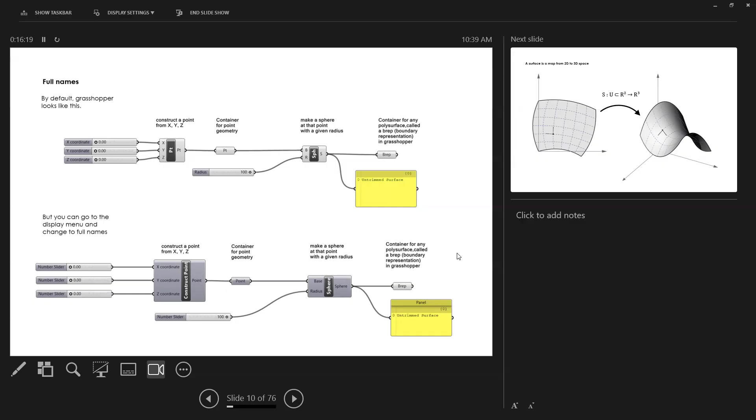So at the top in the display menu. The other thing we talked about, this idea, which I think is the most important idea, that a surface is two-dimensional and that its three-dimensional shape is a map from its two-dimensional self-knowledge to the three-dimensional world. That's what a function is: what a parametric function is, it maps something from the UV coordinates, which are essentially planar, to a 3D form.

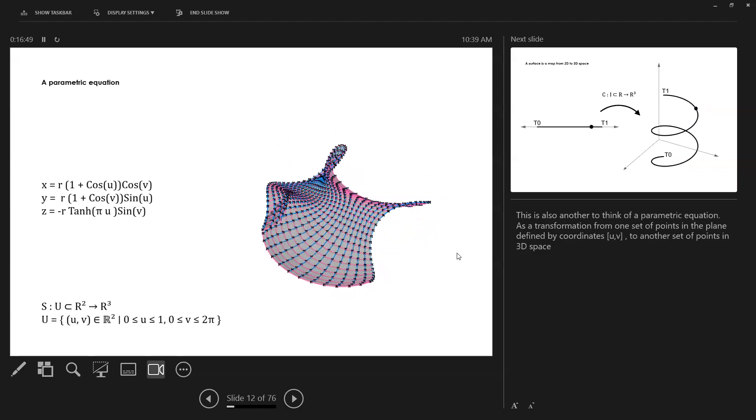And that the same is true for a line. A curve is a map from a 1D space into a 3D space. And so a curve has one parameter, one identification number, which is the t. And that, by the way, I didn't say this last time, is why this command Flow Along Surface does what it does. It just takes things in one UV space and transfers them to the other UV space. The spaces are completely unrelated to each other. It doesn't matter what shape this is.

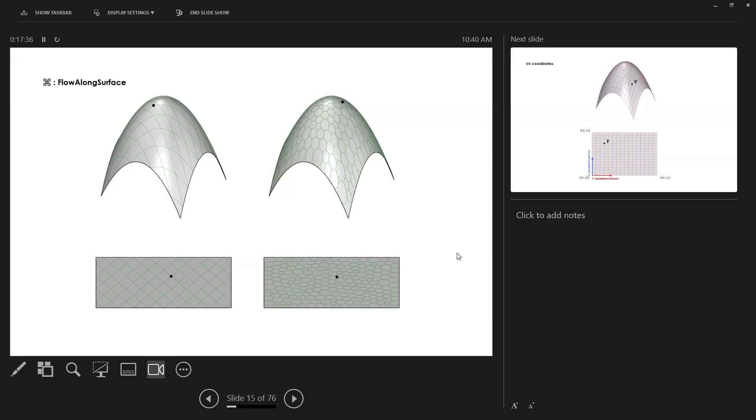This has UV coordinates and this has UV coordinates, and it just duplicates the UV coordinates from one to the other, because every NURBS surface is four-sided, and so it always has U from one number to another number and V from one number to another number, and you could translate that into another surface with an enormous amount of distortion, but without any difficulty, because there's just a one-to-one translation of the coordinates.

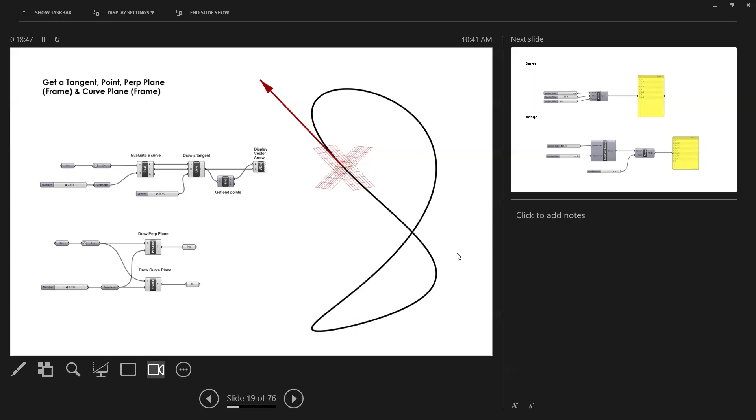We talked about this idea of parametrization, which is that there is the domain of the particular curve, in this case 95.6 to 470.4, the address signature of the t numbers. And if you go to reparametrize, always for both surfaces and curves, that will take that from 0 to 1. And we also talked about using Evaluate Curve with the parameter to get either the perpendicular plane or the curve plane or the tangent at the point.

And then lastly, we talked about this idea of series and range, which are two different ways to get lists of numbers like that. Okay, so I want to talk a little bit more now, moving on.

A little bit about lists and trees. They get very complicated, but essentially Grasshopper stores things in lists. A list is just a long list of either numbers or integers or vectors or surfaces or anything. And when you compare two lists to each other, it just compares the first numbers for a while. And then when you get to the end of one, if it doesn't match up with the other, it just compares the last one to itself. And I'll show this practically in one second.

And then the other idea that's important is this idea of a tree, which is a list of lists. And what happens with the tree is it will compare every item in a branch of the tree to every item in another list. And this is what causes the crash, where things get compared hundreds and hundreds and hundreds of times. And so matching up the data structure of one to the data structure of the other is what causes it to work or not work.

And this is complicated. It's the hardest part of the whole thing, trying to get the data structures to match up with each other so you get the right comparisons between one list of things and another list of things. You just have to get the right things to line up with the other things. And this is the only thing I would say that is really tricky. And for the most part, this is why I try to keep things simple.

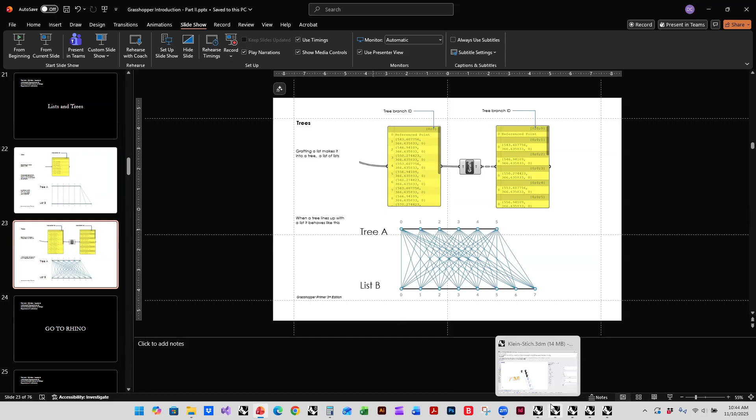I don't like sitting around trying to rearrange my data structure, and then if I change one thing, it'll all fall apart. So for the most part, the things that I show you today, I try to work with very simple data structures. If I can't get it to work in a simple way, I'll come up with a different way of doing it. Okay. So just to give an example of that, if I go into, by the way, I didn't used to do this in quite the same way. I used to go through my models first, so it was much more focused on the physical modeling.

And then I would just give you a lot of scripts. And then I would also go through the Grasshopper more quickly. And I've decided to do it a little bit differently, which is I just want to go through what I think are the important concepts and record them and do them in front of you, because I think there are lots of concepts floating around.

And some of those concepts really don't matter, and other ones I think do matter. And so I want to go through the ones that are important. And I want to go through the physical models one by one, if there's time. I'm not sure there's time, but one by one through the idea of the parametric modeling so that you can see what narrow part of it I apply to the physical model.

That's the idea. When I make some of these physical models, I think it's important to apply a small amount of parametric modeling around a few key concepts. My idea is to show you, in the time that I have, what I thought was useful and how those things were created. Okay, so this is the stuff I went through last class. Some of this is new. It's essentially a different version of the other thing.

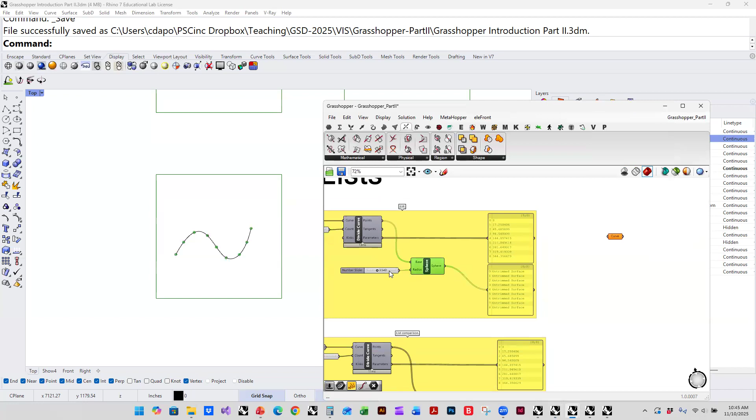So in here, if you have a curve like this, let's hide these. If you have a curve, you go set one curve. And then if you do a divide curve, it will make a list of points. And if you look at the parameters, you can see there's a long list in here, okay?

And if I wanted to make a sphere at each one of these points, I could do a sphere, and I could give it a radius, and that will make a sphere at each one of these points. And if I change the number in here, it'll change the number of points in the list. If I wanted to make spheres of different radiuses, I could make a list of radiuses and compare them to the list of points. So I can do that simply with something called merge.

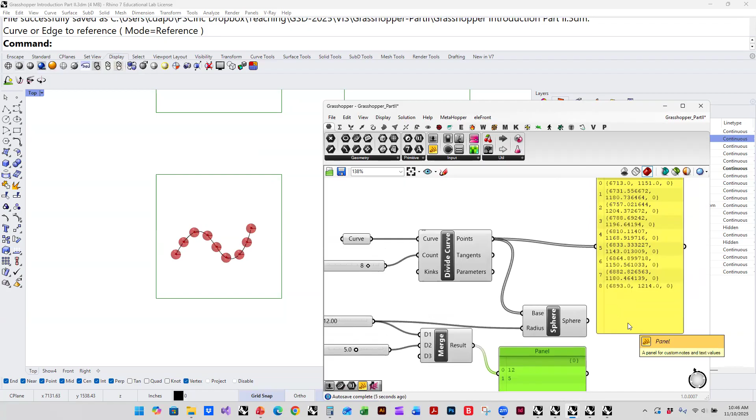Let's put a 5 in here, and let's put a 12 in here. And then if I look at this, you will see there's a list of 12 and 5 and a list of 8 points. So if I put this list of 12 and 5 in here, it's going to compare them to each other. It's going to use the first one first, and then since this list is shorter, it'll just compare to the last one. Okay, so this is the basic comparison of the lists. It's just comparing one list to the other, like that, okay?

But if I were to convert this list into a tree, which is done with this thing called graft tree, if you look at it now, it will be 4 independent lists, each with one item in it. So before it was a list of 4 items, and now it is 4 lists of 1 item. And you could have lists of several items and whatnot. You can also graft things by right-clicking and going to graft. And flatten will smush it all back to a single list. I rarely flatten, but I often graft.

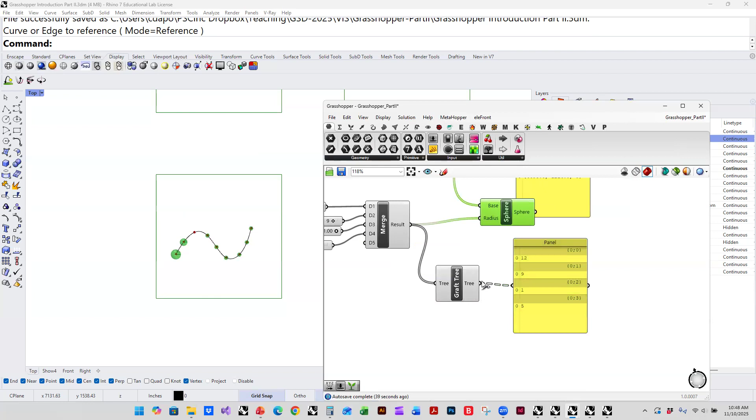So if you put this in here and you zoom in, you'll see that it's doing one of each radius for every single point. So it's comparing the list to the tree in that way. Essentially, what it's doing is trying to match up the structures, with this default behavior. And this is very useful because let's say I had two curves and I wanted to have a different radius on each one. Let me delete this so it doesn't work.

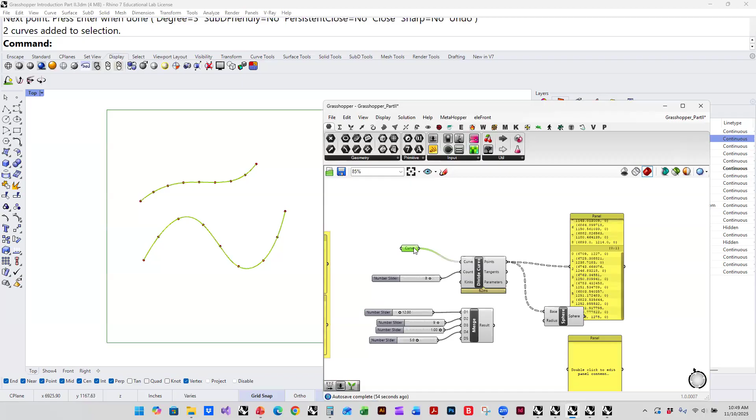If I were to go here and go set multiple curves, now I have two curves, each with multiple points. And if you look in here, there are now two lists. It by default created a tree. There are now two lists, each with 8 points on it.

And so if I were to now make a list of 2 and graft this, if I look at this, you can compare the data structure. So this has 0, 0 signature. This has 0, 0 signature. That one's 0, 1. This one is 0, 1. And if the data structures match up, the behavior is predictable.

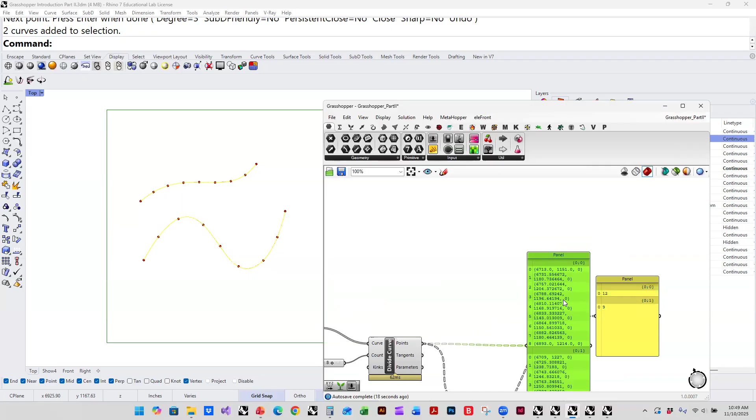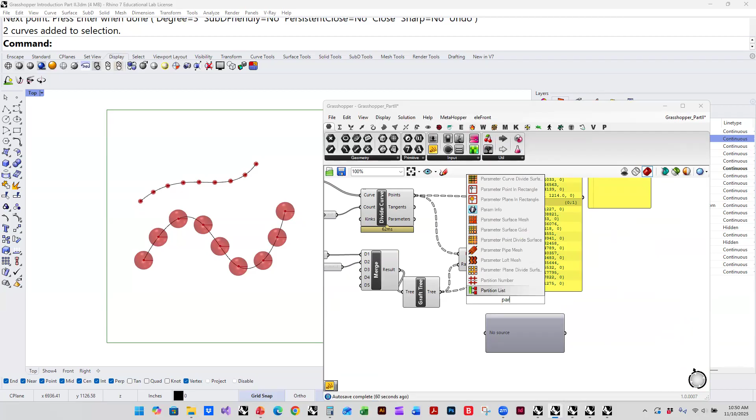And it's not actually that organized, and that's because when they were developing it, they had to make certain priority decisions about when things would be added and when they would not. Okay, so this is the main idea, is that there's lists and trees, and if you look in here at this param viewer, which is right here, this thing that looks like a tree, or you can double click and go param viewer, like there, that thing.

And you put this in here, I can see it says it's data with 2 branches, and they each have 9, or I can go to draw a tree, and it will show me a little graph of a single thing branching into 2. Okay? So when something doesn't work, this is usually why. All right? But I tend to try to keep this as simple as possible. And often when I'm working on things, I'll just do the same setup twice on different surfaces.

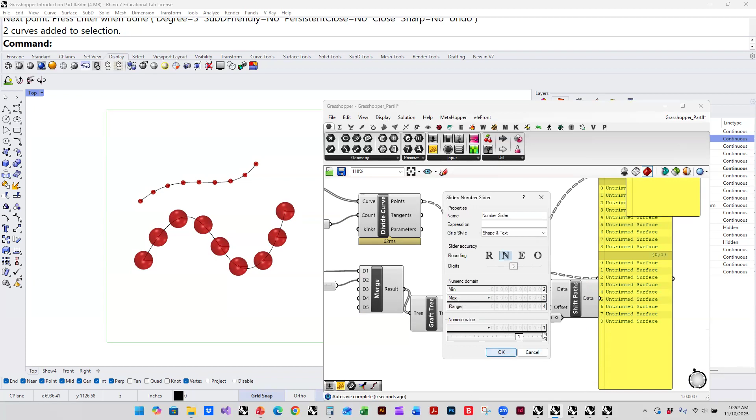Then I wanted to go through a couple more tools for this. So there's graft, like I said. There's also flatten. If you right click and you flatten this, it will smush it all down back into a single list. And there's also shift paths, which takes an integer number and shifts the tree by 1 in either

positive or negative directions. So many times you'll see things in my scripts where there's grafts and there's shift paths. This has nothing to do with anything except trying to get the number signatures of the lists to line up. And remember this component, because it was acting on 2 things, by default it created a tree. So you have to compare the data structure and make sure that they line up. And I usually in my scripts try not to do the little arrow graft. I try to put an actual one in so that you can see it when you're following along. Okay, so that is the first thing.

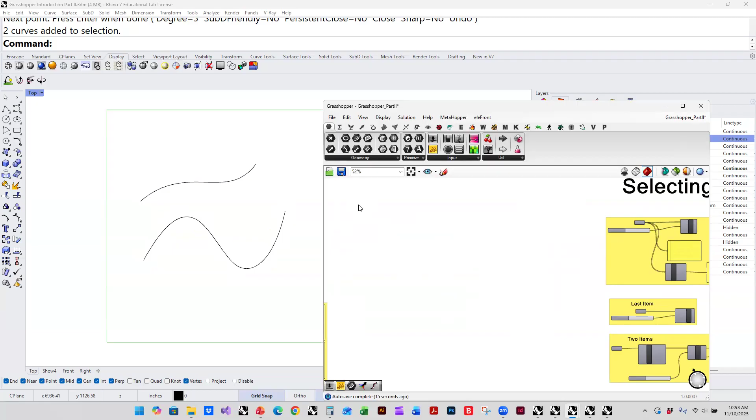And then I wanted to talk a little bit about selecting things from lists, because that comes up a lot. So if I have a bunch of items like this, and I make a container for them. Now remember, these are poly surfaces. So a poly surface is now forevermore called a boundary representation. And so if I do what's called a list item, I think I just have to type item. Yeah, there it is. List item. This takes the index and returns a single one of them.

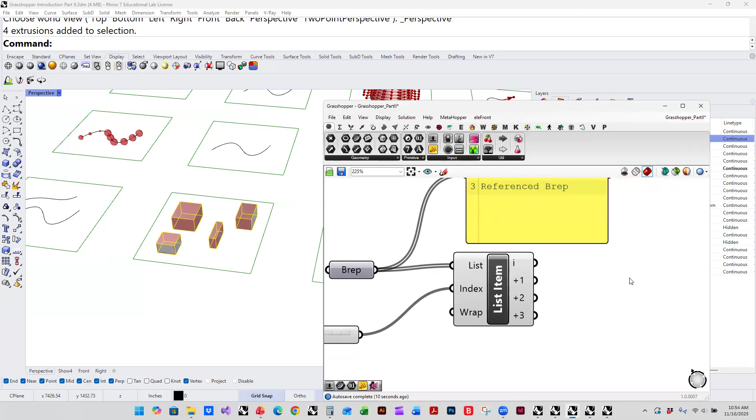So this selects the fifth item. It's actually the sixth item. 0 is the first one. Selects one in the list. And if I wanted to select two things, I can go in here and add. And then I could select the next two with a little merge. So that is how you get items out of a list, by doing this list item thing. I do this a lot. You'll see this list item thing a lot. You can also reverse the list. And then the first one is now the last one in the list.

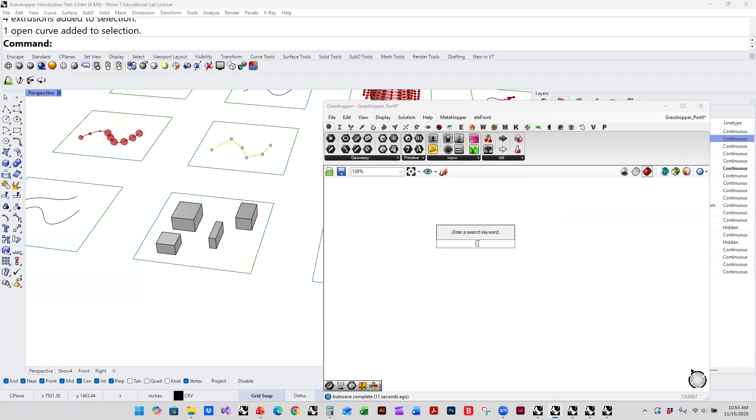And then the other thing I do a lot is I will select every other item in the list. So if I take this curve, and I do the same thing I did before, set one curve, and then I go divide curve, and I put in, I don't know, 25. And then I do this thing called a dispatch. This takes a pattern of true falses. If you mouse over it, you can see it says true false. You can change it by right-clicking and going set multiple Booleans and typing them in here. Or you can do a merge and do these Boolean toggles.

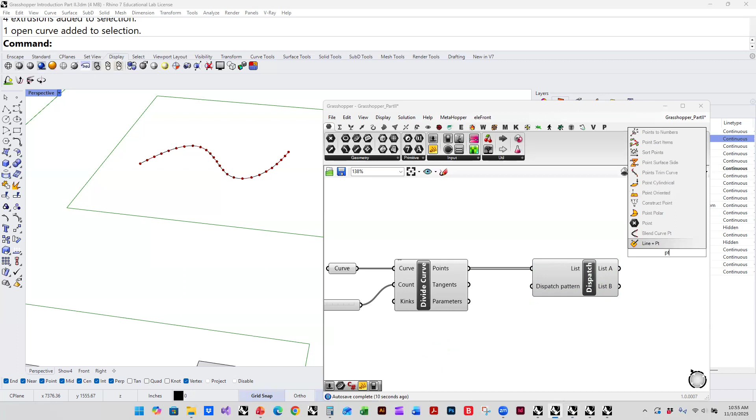It's false, true. And then this one outputs all the falses and all the trues. So this little thing, I usually use it just to split lists. So if I put the points in here, you can see it's getting every other point.

Yeah, there is random. Like you can do random. It's a little more tricky. You can generate a list of pseudo-random numbers. And then I could do a range, this would take a range from like 0 to 10. And then this takes the number of random values that I want. So if I just wanted one, and then I would do a list item.

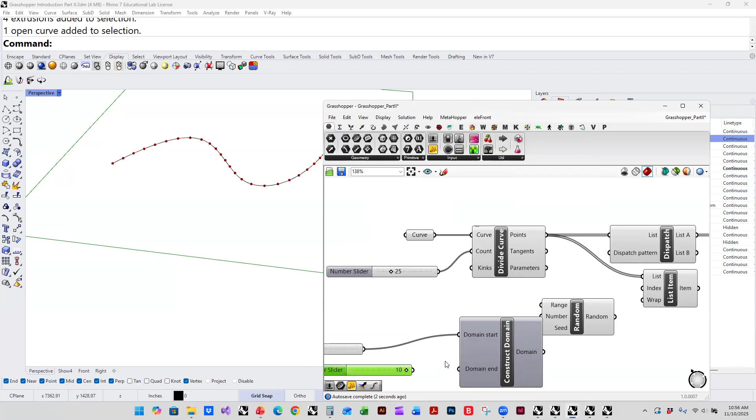So I could do a domain from 0 to 10. And then it's going to give me a random number. And I could use that as the selection. But yeah, you can do that. There's other ways too. I think you can do randomly remove n items from a list.

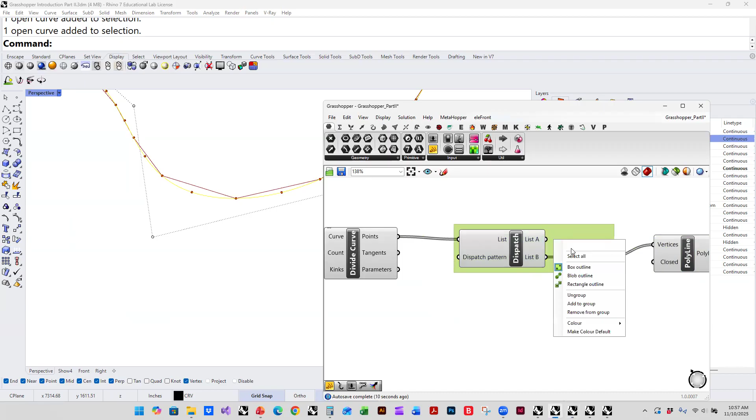But I usually only use this dispatch to make alternate things, and then I'll, I don't know, draw a polyline. That's a polyline now from every other point. And if I wanted to flip it, I'll often just manually go in and remember that there's a part of my script that can cause things to flip. And I'll just group it and say flip here or something. Something like that. Okay. All right.

Is that clear? A little bit. The pacing is hard for me. I never know whether I'm going too slow or too quickly. So some feedback is helpful. Okay. All right.

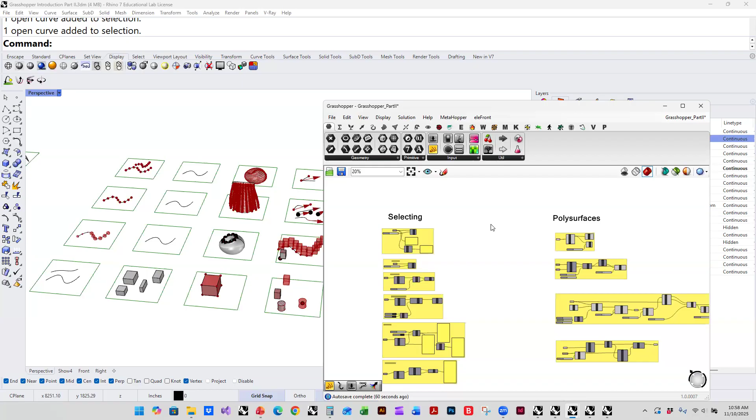So then what I wanted to do now is an application, because by the way, I think I've shown you enough that you can do most things that you need to do in this class already. Since many of your models are poly surfaces, you can't use the evaluate surface component that we used last time. You have to get points on them in a different way. Like if you have a poly surface like this, you can see I could go brep, load it in.

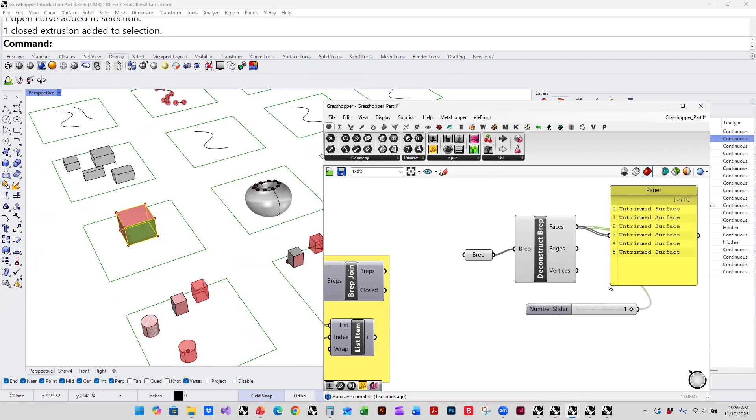Let me turn these off. And then I can go brep deconstruct, and that will take the individual surfaces out of it. And then I can do list item to select one or two of the surfaces. But that is sort of very manual. If I look in here, I would have a list of 3 or 4 surfaces, 5 surfaces, and I could plug that into a script, and I would have to manage the data and make sure that things work out correctly.

But most of the applications we're going to be using are often just about making holes in things, making bolts. Okay. And so what I will often do is just make a bunch of points. Let me turn these off. Okay. So this is kind of an application. Let's hide that. So if I wanted to make some bolts on this thing, what I would often do is just make some points on it manually.

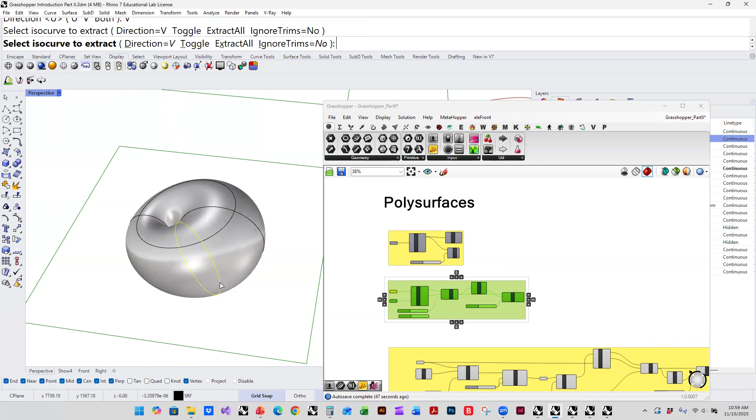So I might get some isocurves. I could even manually divide them, get a bunch of points. And then I can use each of those points to make a kind of a normal bolt to the surface using Grasshopper. So here I'm going to do the same thing I would do before. I can do brep, set one brep, and then I can do points,

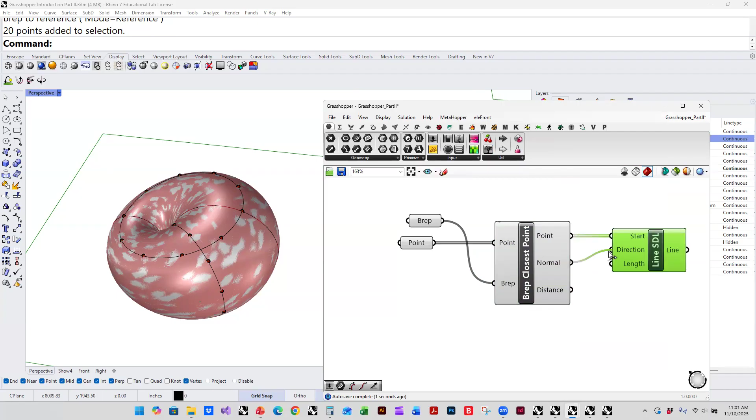point, set multiple points. Now I have a long list of points, and I have a single brep, and I can do brep closest point. Take these points, drag the brep in, and that gives me some information about the surface. It gives me the closest point, and it gives me the normal to the surface. And then I can do the same thing I was doing in last class. I can just do this SDL from the first point in the direction of the normal times a certain distance.

And then I would get these kind of normal things. And then the other thing I will often do, so they go through the surface, is I will scale them from the endpoint. So I do this operation a lot. I'll take the endpoint of this line and just scale it by 2 from the endpoint. So I'll do this other thing, endpoints,

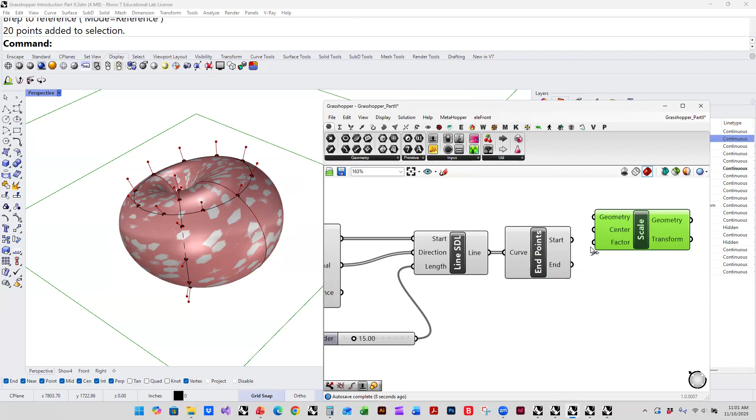take the endpoint, and then the scale is asking for a factor, a center, and a geometry, which, if you think about it, when you type scale, it asks for the same thing. It asks for a base point, a factor, and the geometry. Okay, so it's just kind of like a literal, super literal version of that.

I mean, there are zillions of ways of doing everything, but it often depends on what you want. So I was going to do another application, try to build up in complexity. But often, if you can't get it to work by arraying the bolts around the surface of some pattern, just do it this way. You don't have to do it manually. You can automate 10% of the process.

So I think when you're using these things, trying to automate 100% of it is a mistake. I think you automate the most pain in the ass part first, and then you kind of work up to that. So yeah, first of all, I could have just divided these points from the curves rather than doing the curves manually in Rhino.

Or I could have extracted all these curves from the surface in some way, either by contouring it or by extracting the isocurves. Or I could have just divided the surface down. There's the divide surface component. But in terms of locating them in the right spots, I think that's the question.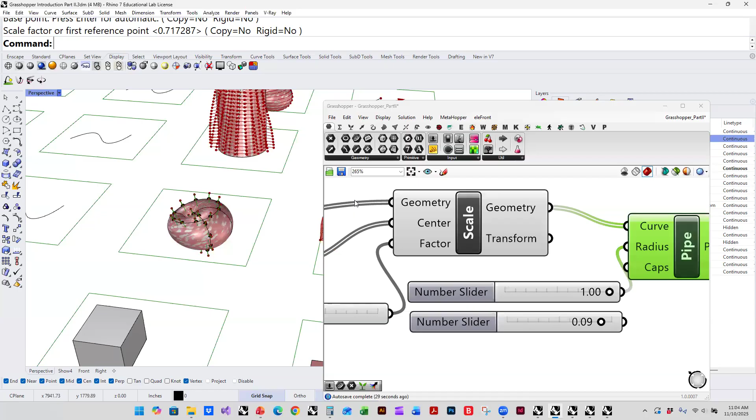But really, what I'm trying to convey is that to do tiny operations requires a very low lift. And if you want to learn the software and learn the process of designing your algorithms, I think doing little things is the place to start. Okay. And then you could ask me and we can figure out how to automate more of it. Okay. So yes.

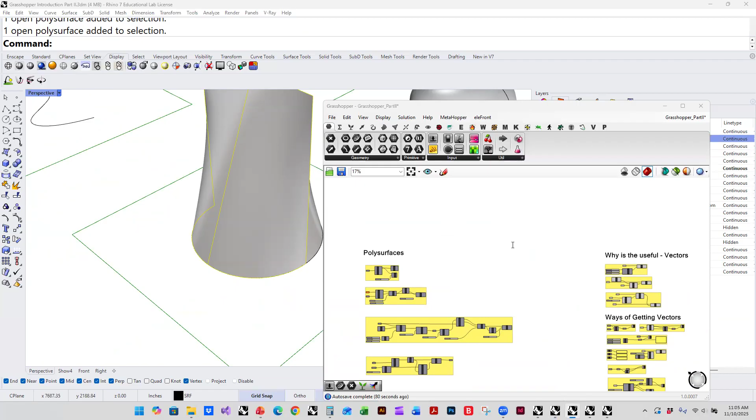So let's say in this example here, let me hide this. I think what I did is, this is a poly surface, so it has multiple things. So it's harder to just extract the isocurves from it directly, because it's many surfaces. So here I'm going to do a B rep, set 1 B rep, and I'm going to do a contour.

And this takes a B rep, it takes a start point, so I need to give it some points. So I will often do that just manually. Just give it a point. It takes a direction, the direction of the offset. So I'm going to do a unit Z, which is the world Z up. Put that into the direction, and then let's do a distance. So let's do something big so I don't crash.

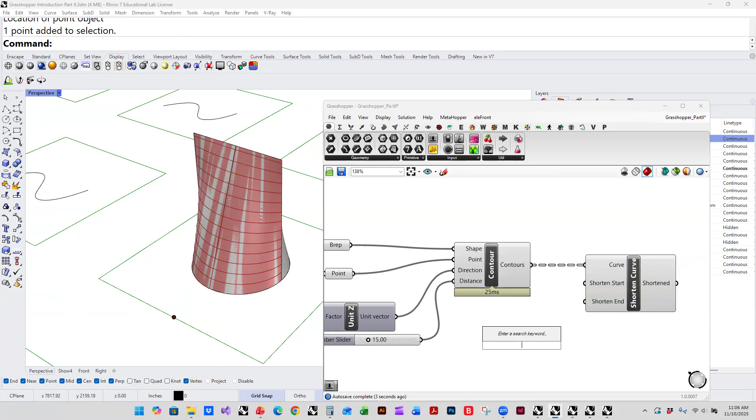One thing that you will notice is that every single component duplicates the data. So the old curves are still in here, and I have to hide them if I don't want to see them. So now I've got a bunch of short curves. And then I could divide all of these down. I could do divide curve. Let's do 15.0. Let's do 8 bolts.

Okay, and now if I look in the data structure here, I should have a list for every single curve that has 8 points on it. So very quickly, I'm getting lots of information in here. That's because if I looked in here, it was already grafted, there used to be 13 curves. And now when I did the divide curve, it did it on 13 and created 13 lists of points. So usually before I plug things in, I will look at what the structure is.

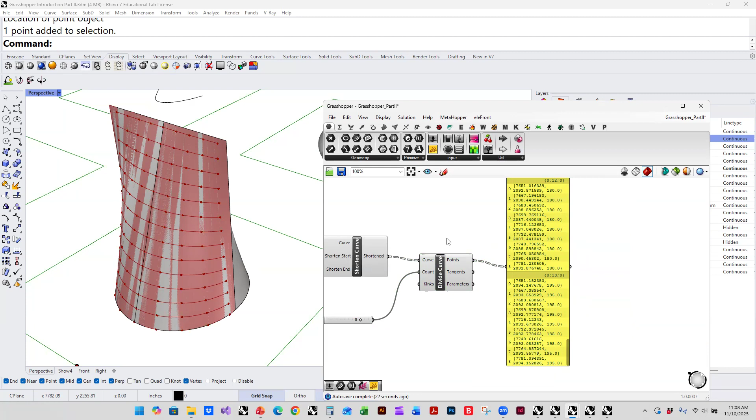Now, these are just the points. And so these parameters don't relate to the surface at all. They're from the curve. So if I want to get the normal to the surface, I have to do the same thing I did previously. I can do a B-rep closest point, go back, find the original B-rep, plug it in here, take all these points, plug them in there, and then I can just do another line SDL from the start point in the normal along the direction.

Okay, so essentially this is the same script I used last time. It's just starting to add functionality. Does that make sense? Anyway, this little thing is for contouring of B-rep and adding normals. So there's a slightly more complicated version of this,

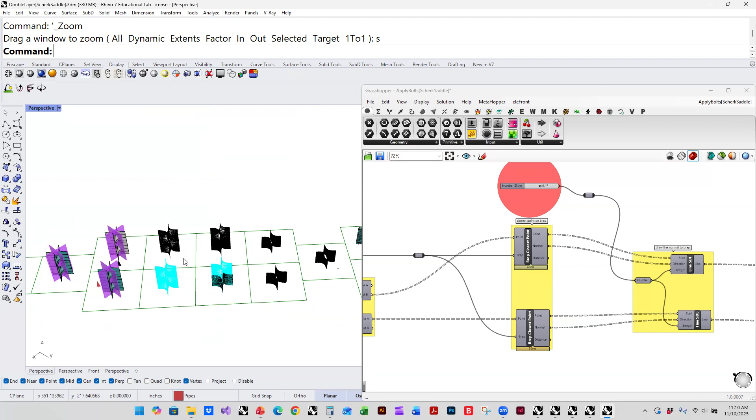which is in, by the way, I'm progressively uploading my model file. So like this is the model file for the tower thing. This is what it looks like, the double layered tower. So this has two double layers of surfaces offset. So you can kind of see the modeling process in here. If you are interested in how I made one of them, I'm uploading them kind of progressively as I get to the level of complexity that I think we're dealing with.

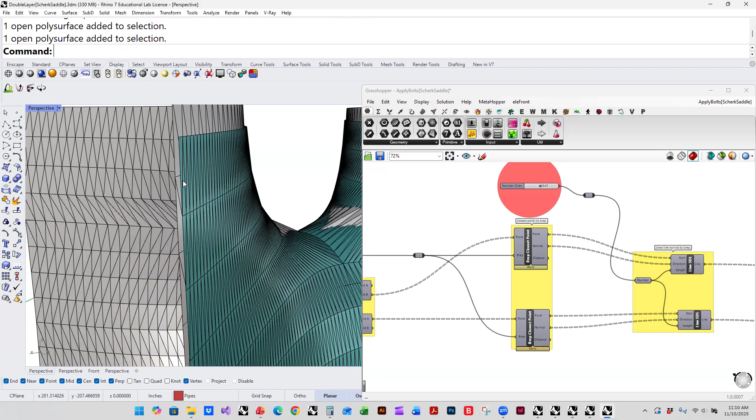So in this one, I have these two kind of back-to-back surfaces, and they're made with all of these grouped strips of things, and they are shifted on each other. So like every other one overlaps every other one by half. And so they need to be bolted here and there through each other. And so the first thing I think I did is I downloaded a model of the rivet that I was using, checked the diameter, scaled it up so that I thought it would work. And then this is the script that applies the bolts to these.

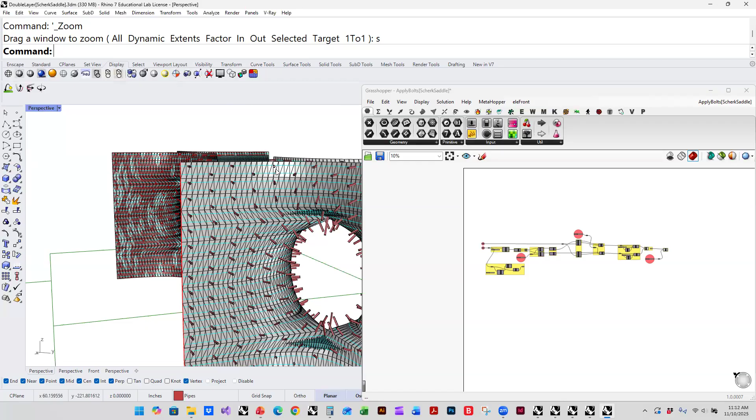Exactly what I've just been doing, but it's slightly more complicated because in this case there are many surfaces, and I wanted to get this alternating pattern of bolts. Okay, so in this case, I think the original version did exactly what I had just done, where I contoured it. But I wanted to make something that was a little more general in functionality. Like, let's say you have a model that's kind of complicated, and contouring it in one direction doesn't make sense. How would you apply bolts to a complicated surface like this in some kind of alternating pattern?

So I think what I did first, this is the manual part, is I just contoured it twice using Rhino. But these curves could have been made some other way. So these are the curves that I want to apply bolts to. I want to apply a bolt here, and then another one a quarter of the surface, another at 3/4 of the surface, and skip the half surface, which is where the back of it is hidden there, right?

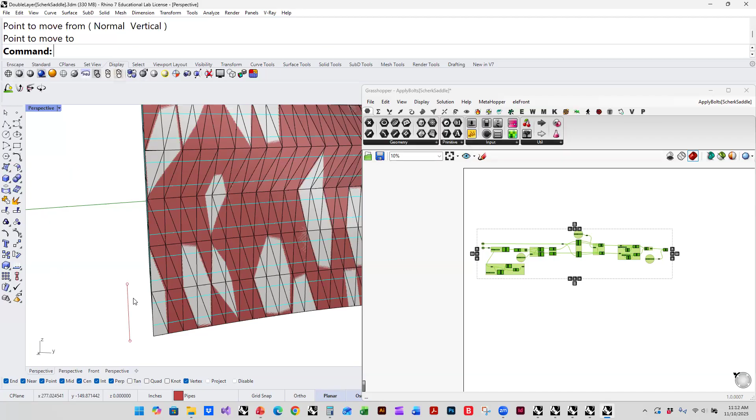So there are two ways to do this. Okay, so let's say I have all these curves. Since I want to take every other curve and apply an alternating pattern, I can either in Grasshopper sort them in some way. Sorting is very complicated.

I could sort them vertically or sort them by the x-axis or sort them by length. Sorting is often a big challenge. Or I can just sort them manually. And in Rhino, when you make something, there's a digital signature for when, and it is a timestamp on every object that was created when it was created.

So in Rhino's memory, every object is contained in a long list, just like in Grasshopper, and they are ordered in the order that they were created. So you can use this Rhino script that I uploaded. It's called like reorder geometry. There's a Python one if you have a Mac, and there's a RVB if you have a PC. And it just lets you click on a bunch of things in the order.

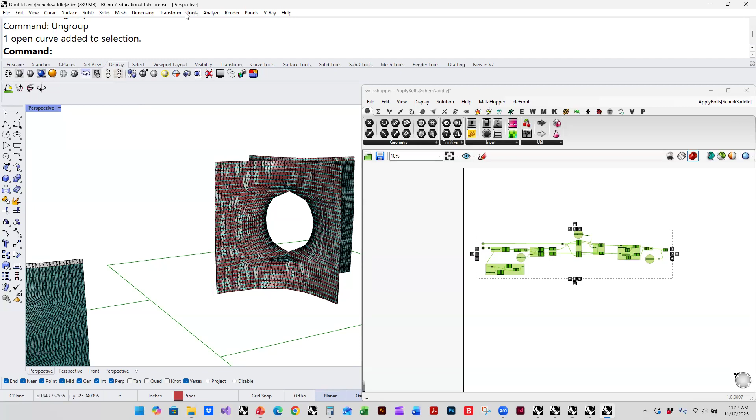You can just go tools, Rhino script, load. You can add it. It's uploaded on the developable strips thing, reorder geometry. Then you can add it. Some crunch. That's because I have too many things open, and because probably it's trying to fetch it from the internet. There we go. Okay, so you can add it, and then you can just go through selecting things in the order that you want them to appear in your

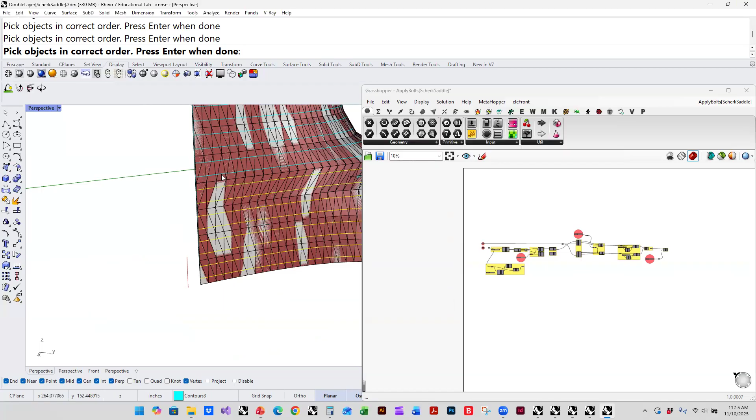in your script. And this is to remove the process of ordering from the Grasshopper, which is extremely annoying. I hate ordering things. It's like gluing. It's one of the most time-consuming things you can possibly do, is try to get things in the right order. There's always one that is like out of order. Awful. So you can just order it manually once.

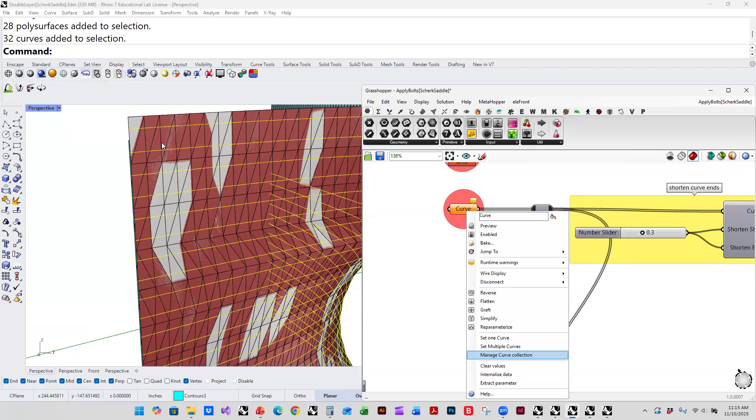Hit OK. It'll wait. They'll be all grouped in an order. And then it'll say reorder. And then you can put those in here. And you can put this in here. And it should, if it's on. Yeah, make a bunch of bolts along those curves in an alternating pattern. This has to be a single poly surface. So I joined all of these into one surface, and there were parts that I couldn't join.

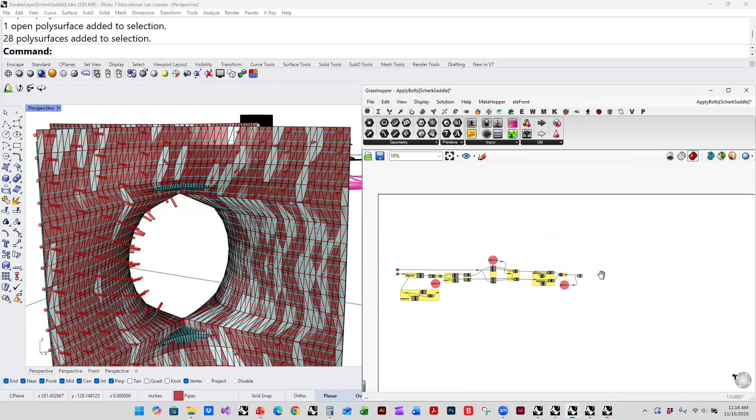For example, there's a part here, this little zone wouldn't join. And if that's the case, I would just quit and just do it twice. I'm trying to say that the goal to automate everything is a fool's errand. Okay, so you can see it's doing it on half of it. It's good enough. All right, so this is the same exact script that I did previously. I'll just kind of rebuild this again, but there's a little more complexity to it.

Okay, so let me turn this all off. I don't know why it's showing this in red. Oh, because it is red. Okay. Let's not make it red. Okay. So now I've got all these curves in here. I've got the B rep in there. Here are my curves. I can do the shorten curve thing.

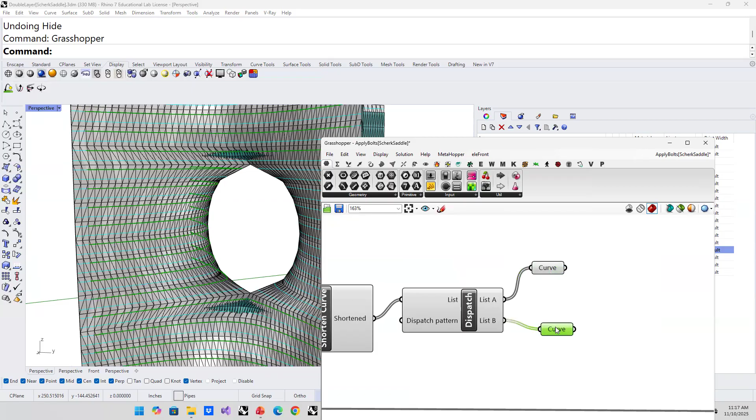And then what I did here is I wanted every other curve separately. So I used a dispatch, and now I've got two lists of curves, one that's there and one that's here. And then I did again a divide curve, and I'll do it by 20 or something. Let's do it by 20. And let's do this one also. And now let's do another dispatch.

And take every other point of this list and every other point of that list. And then we can take the opposite ones of those. And if you look at this, I'm generating an alternating pattern by just doing these dispatches. I took every other curve. They had to be ordered in order to do that. If they were not ordered, it would have been chaos. But I just order them manually, every other one. Then I divide them down, every other one.

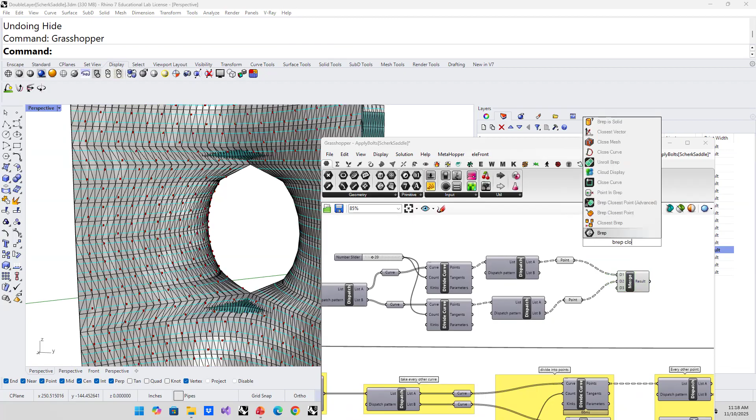And now I can do the same thing again. I can merge these. I can do a BREP closest point. And I can draw the normals. Okay, I'm just doing the same damn thing again and again. It's the same script, just trying to build up layers of functionality. So if you wanted, you could just make manual points and use the first one.

Or if you want to create the pattern, you can create alternating patterns with these dispatch commands, and you can make your own pattern if you want a 2-2-1. Okay, so that makes some sense. Very confusing, I have to say, if you're just watching me do it, but still, I think

it's the same process. The limited number of tools that I've already introduced, I think, are sufficient to do this operation of putting bolts onto surfaces or little holes or whatever. This is all you really need, is this line SDL and this BREP closest point to put holes into models parametrically. Okay?

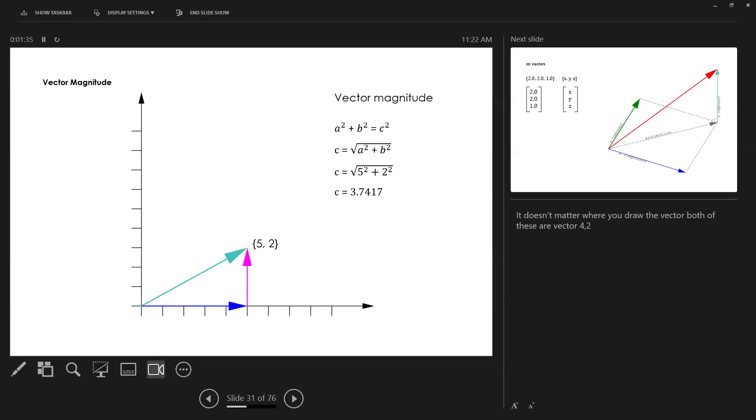And the magnitude is taken using the Pythagorean theorem, that is the magnitude of the vector. That is in 2D. There are also 3D vectors, which are just lists of 3 numbers, X, Y, and Z. By the way, they are the same as points. There is basically no difference between a point and a vector. Sometimes we think about a point as a vector from the origin to the point. They're the same computationally, the same mathematically.

And so you take the magnitude again using the Pythagorean theorem twice. You get the square root of a squared plus b squared plus c squared. And then you can unitize a vector, which means making its magnitude 1. And that is by dividing every component of the vector by the magnitude. So here the magnitude of this vector 2, 2, 1 is 3. And if I want to unitize the vector, it would be this vector, 0.6667, 0.6667, 0.3333. That is magnitude 1 in the same direction.

And so in Rhino, in Grasshopper, very important when you have a vector, like for example, this normal vector. By default, it probably has magnitude 1. But when I put it into a vector, I can right click and go unitize, which will set the magnitude equal to 1. And then if you multiply it by something, you'll know how big it is.

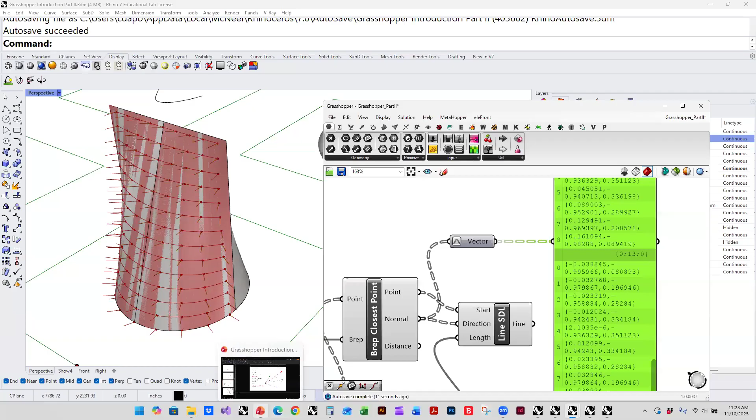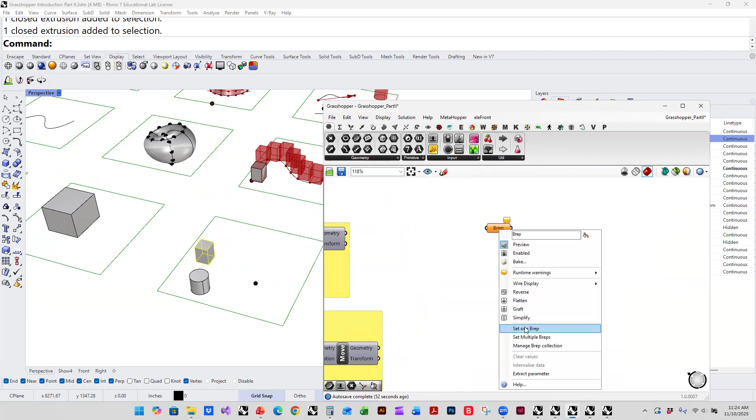In Grasshopper, anytime you want to move anything, anytime you want to do anything, you're always doing things with vectors. So if I go back to my thing here, all of this is vectors. So let's say I wanted to move something. Let's turn some of this off. If I wanted to move this Brep, I need a vector. So I could make a vector X, Y, Z, put some numbers in, 25, 100, 10, and then I can use a move, and the move takes the vector.

And what you will notice is there's no such thing as copying in Grasshopper. You just move something because it always is copying everything. Okay, so that is the vector. And there are many ways to get vectors. So this is just the dumbest way, inputting the coordinates. Well, I can also make a vector between 2 points. So let's do that with this one.

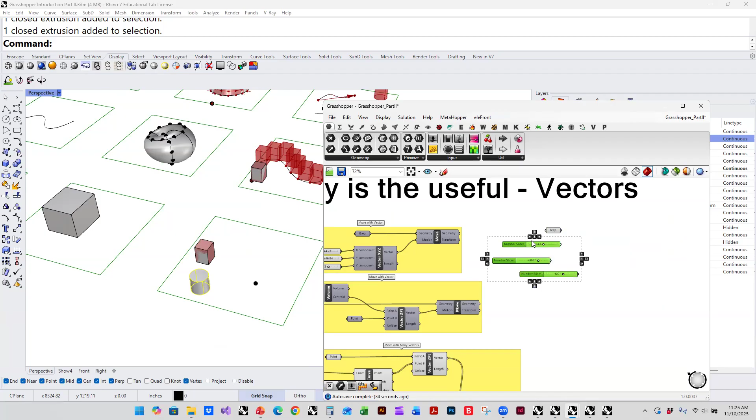I'm going to put a Brep in here, a different Brep. And then I have a point that I created over here. Well, I can get the point using volume. Volume will give me the centroid of the thing if it's closed. Then I can do a point over here. Set 1 point. And I can do a vector 2 point from point A to point B. And then I could do a move.

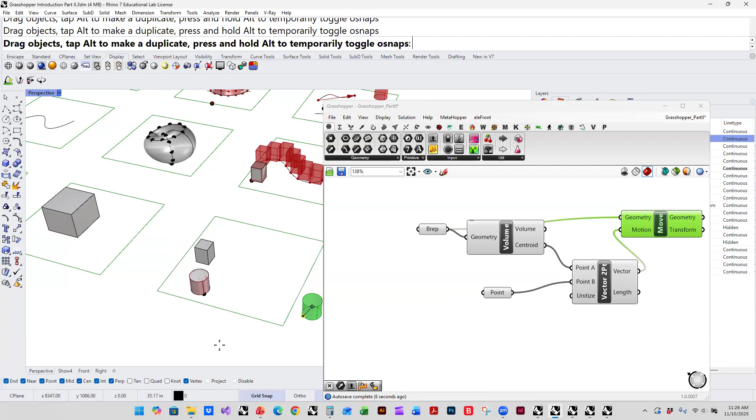And it's going to be moving its centroid to the place. And typically this would be much more kind of normal seeming than you would think, because let's say I have a curve, let's say I have a funny curve, and I'm going to just divide this curve down into a bunch of points. And then rather than having a manual point here, just move it from its centroid to all the points along the curve and use that.

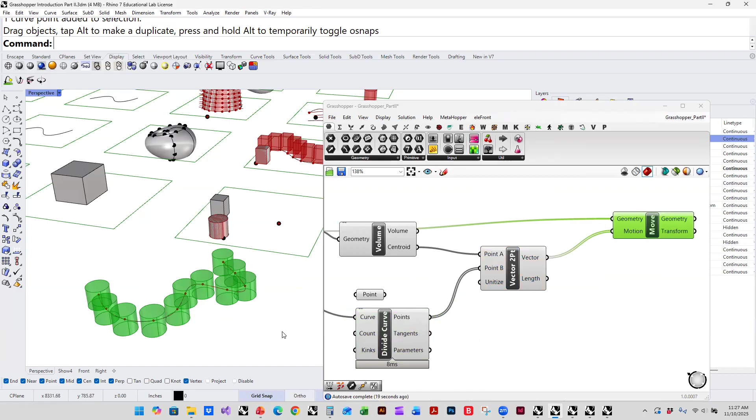So typically, if I wanted to say copy some geometry around on a surface, that would be how I would do it. I would have a start point near the geometry, sometimes created manually. Sometimes, rather than doing this centroid thing, I would just do a point. And then I have a bunch of points that are created in some other process. I make vectors between them. I use those vectors to move.

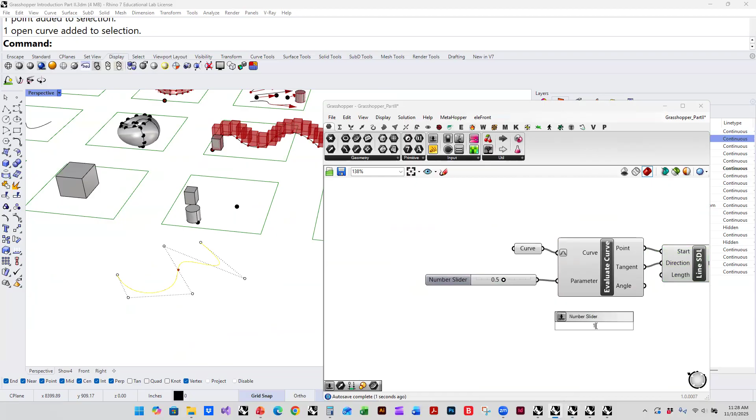You can get vectors in lots of ways. Like I said, you can get them with 2 points. You can get them by entering it manually, or often you can get it, again from last class, by evaluating the tangents of things. Okay, that's also a vector. So these tangents are vectors, and the normals that you get out of things are vectors. Does that make sense? Okay.

So then there's vector arithmetic: vector addition, adding two vectors, tip to tail. This is useful because if you add two unitized vectors, you get the bisector between the vectors. So if you want to move something between two directions, first you unitize the vectors, add them, then you unitize the output, and then you can move something along that direction. There's multiplication, vector multiplication, just multiplication by a thing.

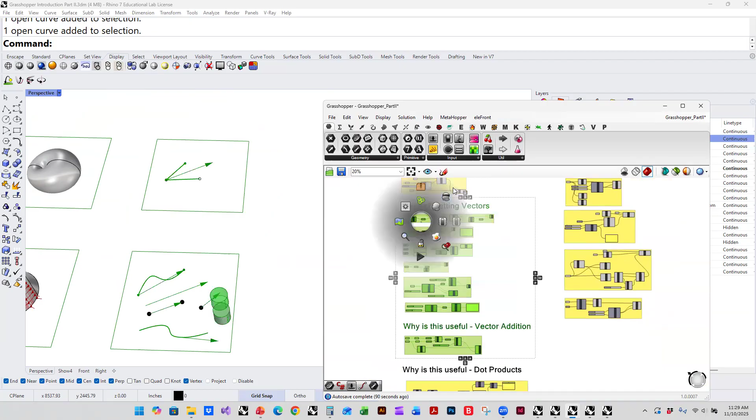So like I was saying, let's say I have this right here. Let's say I have two curves. Set one curve, set another curve. Let's turn all this off. These are two curves. If I just convert these into lines, since they are lines, and then I convert them into vectors, Grasshopper will just do it for me. This is another way to get a vector. First, I have to convert them into lines, then I convert them into vectors.

And then if I unitize both of these, and then I add them, and then I multiply by a number like 150, and then I do an SDL from the start point of one of these curves along this direction. Okay, that's the bisector. Yes.

What's the difference between a line and a curve? A line is defined in the computer very differently. A line is only defined by its endpoints and it's straight. So the computer doesn't store anything except the endpoints. Very minimal mathematical structure, super fast. If you do a curve, it's the whole NURBS structure. And so it doesn't quite know how to convert it into a vector, and it won't give you the magnitude of the vector. Sometimes it'll try, but it's a little unpredictable what it'll get.

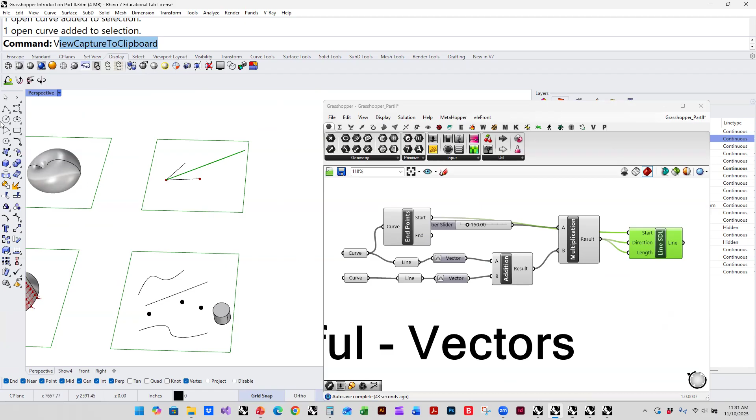So if you turned that curve right there, that swooshy one, into a line, it might say it can't do it, or it might try. Let's try. Set one curve. Line. Yeah, it can't do it. But if I wanted to, I could take its endpoints and I could do a line from the endpoints. Okay. All right. Yeah, it's interesting.

It's a different data structure. So it goes back to this idea of what I was talking about at the beginning of the classes. The curve class knows different things than the line class. The line class only knows its endpoints. It's all it knows. And it has different functionality, like it can calculate direction, it can know its length. And then the curve class knows its length in a different way.

So this is what I'm showing here. Basically, for me as a person, I can't understand something unless somebody shows me how to implement it. I feel confused unless I am seeing the implementation of what I'm talking about. So there's also this vector display, by the way, which will just display it. So this is just vector multiplication and vector addition in practice. That's all I'm trying to show here.

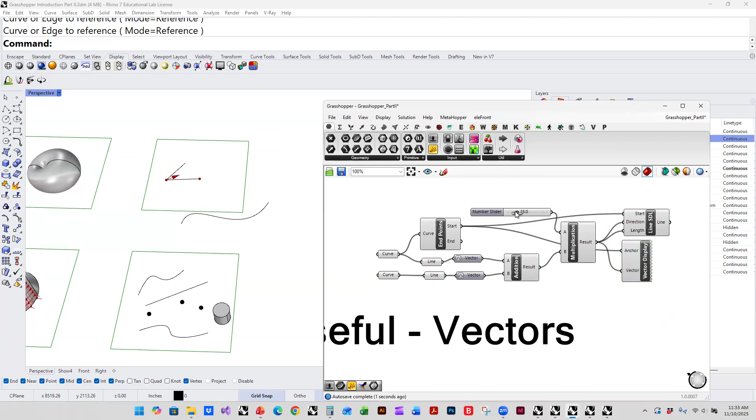And then if these lines were flipped, it would do something weird. It only works because they're pointing in the same direction. So this issue of which direction it's pointing is actually another kind of troubleshooting error that comes up. Okay. Does that make sense? All right.

Now the dot product. These are the two things that I feel like I actually want to talk about. The dot product, okay? The dot product is trig. Remember trig. These are the trig functions. You spent a whole semester on this in high school. That's it. A squared plus b squared is c squared, the Pythagorean theorem, sine, cosine, tangent, the ratio of the sides.

And this is because the sine and cosine and tangent are defined by the Pythagorean. That's why they exist. Okay. So they are the Pythagorean theorem applied to the unit circle, and then the ratios that come out of that, and then they're just put in a big table that your calculator knows and spits it back out.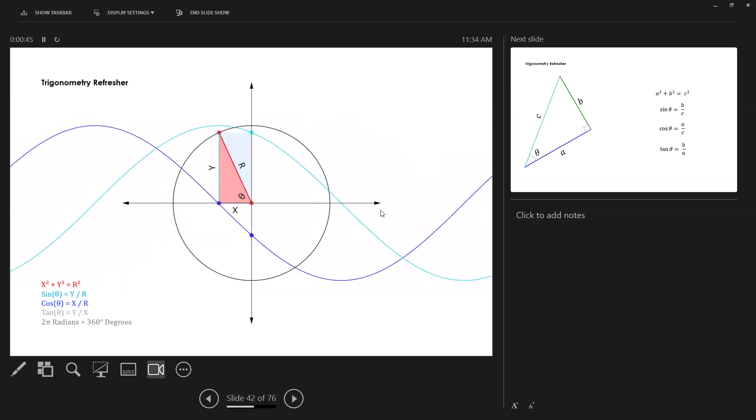Okay, so the dot product is also called the projection product. And it is defined by the projection of one vector onto another. And that would be the magnitude of the vector, which we write as its absolute value. That's what we mean by the absolute value. We mean the magnitude of the vector times the cosine of the angle would give you this sum called the projection product.

So the projection of A onto B is the magnitude of the vector times the cosine of the angle between them. And that number only depends on the size of this vector. So for the dot product, we multiply it again by the magnitude of B. So the dot product is the absolute value of A times the absolute value of B times the cosine of theta. Or you can calculate it in this other way. It's very important. It's one of the most important things in the world, the dot product, because it tells you some information about the relationship between two vectors.

So if two vectors are pointing in one direction, the cosine of theta is 1, so the dot product is a maximum. If two vectors are pointing along each other, the dot product is positive. If they're 90 degrees, the dot product is 0. If they are opposite directions, the dot product is negative. And if they are completely 180, the dot product is at a minimum. This is how you can tell whether things are pointing in similar directions.

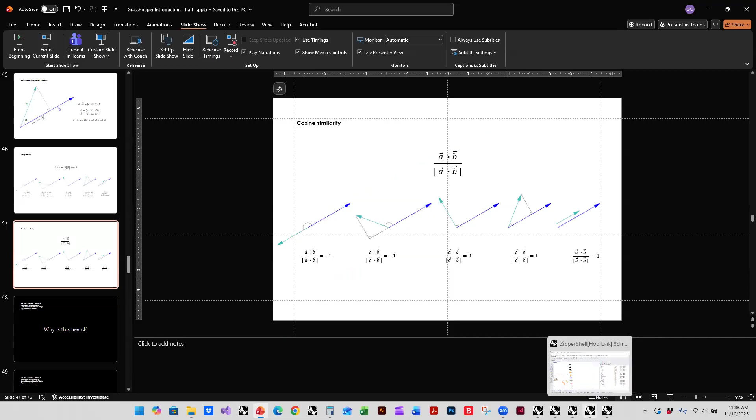So, to give you a very practical example, if I have, let's say, a sphere, and I do set one B-rep on this sphere, and then I divide surface, and I take a bunch of points, and I draw all these normals. Okay, here's a bunch of normals. Let's make them longer.

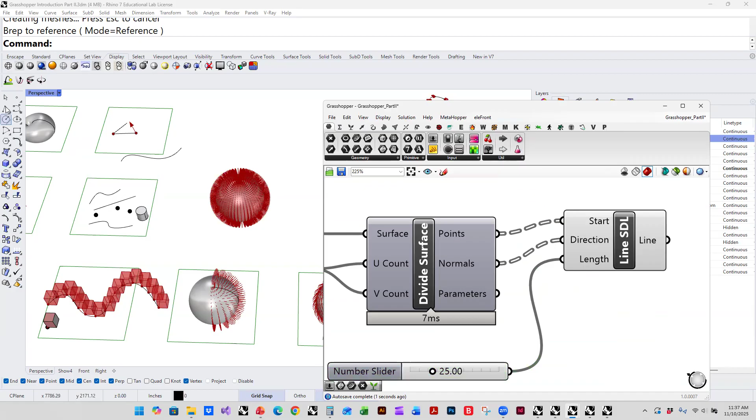If I just have a single line, let's take a line, let's put it in here, and let's convert these to vectors. So let's take the vector here to unitize this. Let's just take these vectors, unitize them, and let's do the dot product between these vectors and this one vector. So I'm taking the dot product between all these normals and this one vector.

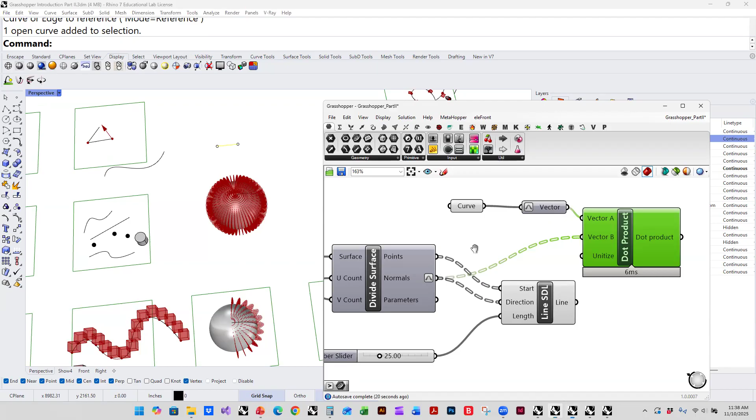And now as I drag this, it's telling me which of these vectors are pointing in the direction of the other vector and by how much. Okay, this is so cool. The dot product is so useful.

I take the dot product of a vector and all the other vectors, and then I compare it to a number, and it tells me whether the things are positive, negative, or 0. That tells me whether they're pointing in the same direction. This will come up over and over again if you ever do a computational design class here. Dot product.

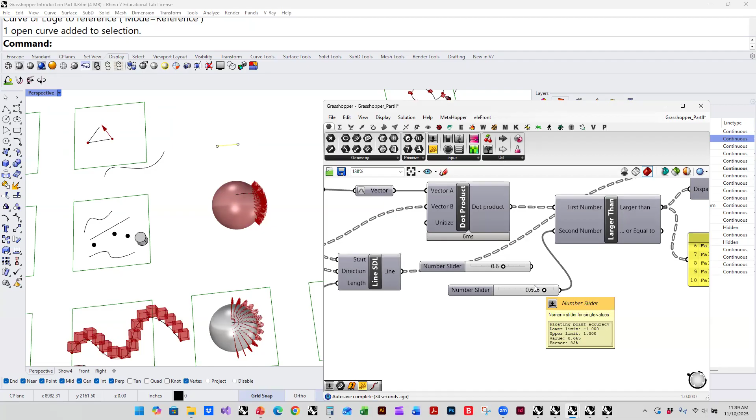Okay, the other one that's important is down here, dot products, and this right here is a little visualization of the dot product. Then the last one, the cross product. The other one that's very useful, the cross product. Remember the right-hand rule?

Find another vector that's always perpendicular to them. Oh my God, so great. The cross product defines a plane also, because two vectors define a plane. And it turns out the cross product's magnitude is the area of the parallelogram, where you can do that funny formula, which is also called the determinant, but it's not important. You never need to do it. It's just useful only for finding the perpendicular vector to two other vectors. Do this 20 times a day. Okay.

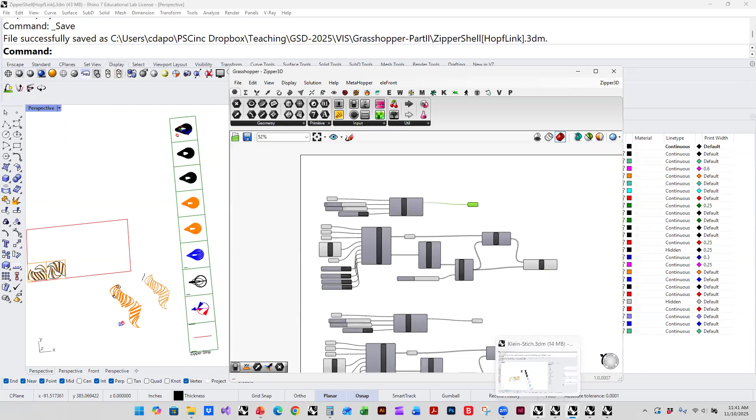So these are them again. Okay, but examples. Examples. Back to my sphere here. Instead of doing the dot product, let's draw all these normals. Okay, let's make less of them because this is kind of confusing. Instead of doing the dot product, let's do the cross product of this vector and the vector I put in. Okay, and then let's do a line in that direction. Oh my God, look at that. It maps the perpendicular between the vector that I put in and the other vector. Yes. So useful.

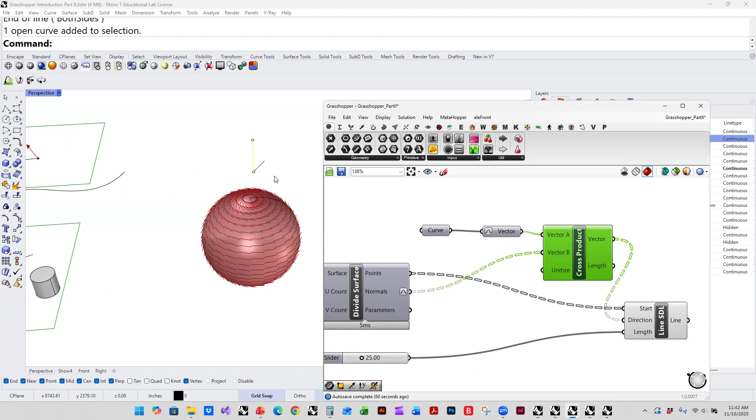If you want to find a direction in space and you have only one direction, the way to kind of convert it into a plane is always by using the cross product. So if I have a tangent along a curve, and I want to figure out how to align things here, I will often need to take the cross product of this vector with up, and that will give me the perpendicular vector. So I'm always looking for how to define a little frame in space from one vector and orient things in that way.

This dot product and the cross product. You don't need to use it for this class, but if you ever want to do anything parametric, they will come up 1,000 times. So you can just go remember them. Okay, they're useful. Okay, so then the last thing, I have 2 minutes. I think I can say it.

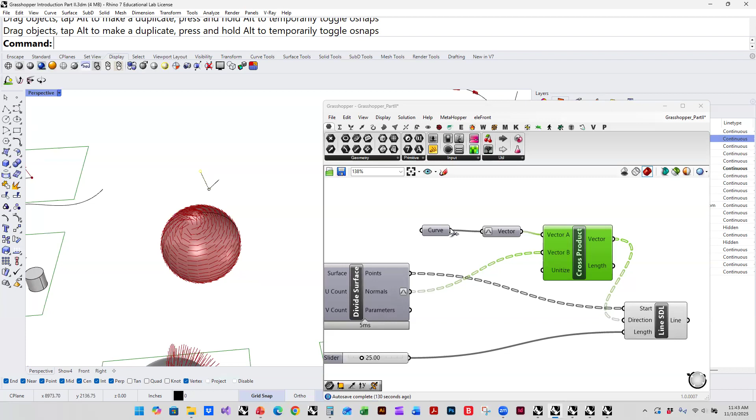The last thing is that a plane is usually defined by a point and one vector, which is its normal vector, or by two other vectors, which are the vectors that would produce it in the cross product. By the way, what's interesting about the cross product is it doesn't matter which vectors you put in. It only matters that they're in a plane. These two vectors can be anything, wiggle around, but they always define the same perpendicular vector. Okay? Because two things always define a plane.

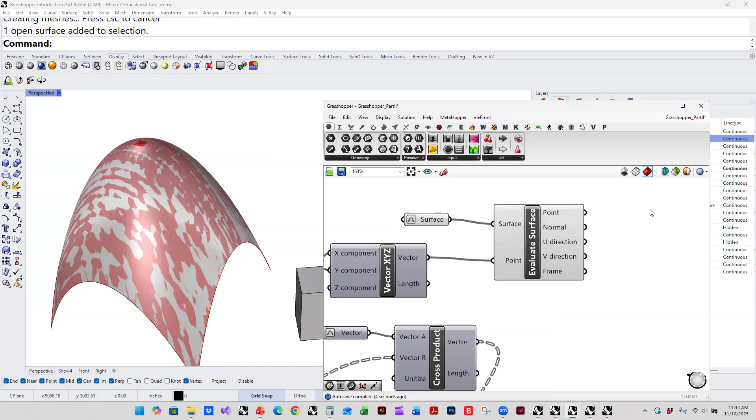So if I wanted to put something on a surface, let's say I want to put a box on a surface, I need to get this surface, and I need to get a plane so I can evaluate the surface. I can evaluate it somewhere, wrong vector. Somewhere on it, get this little doohickey, and then I can orient from plane to plane. So I can take this BREP, and it needs an origin plane, and it needs a target plane. So I can give it an origin plane.

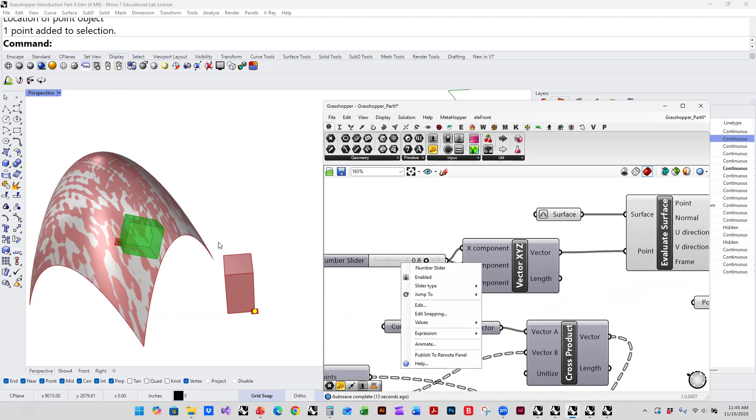The way I usually do this is I just use the standard world planes, like the XY plane, which takes an origin. So I would just put a point here, put it into the XY plane, and then use that as my source. And it will orient this onto the surface, okay? So this is the other thing, planes. Planes made this way.

And I think for the BREPs that I've just been doing where you don't have planes like over here, what you can do is plane normal, and it just takes the origin point and the normal, and then you can map all of these BREPs onto those planes like that. Okay, so planes and normals, plane-to-plane transformations, dot product and cross product, and the BREP closest point.

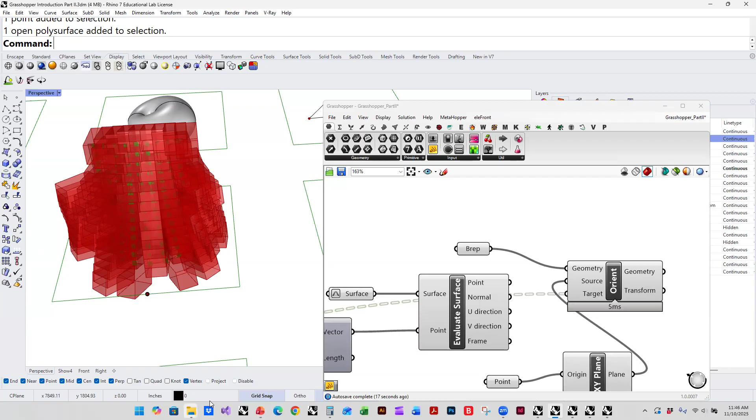Okay, so the other thing that is in here, by the way, are a few of my other models, like this one is in here. So is the script that puts things unrolled on it. So is the Klein bottle uploaded. You want to look at that. I'm going to go over a few more of these scripts next class that are a little more elaborate, and I'll also start meeting with you. Okay? All right.